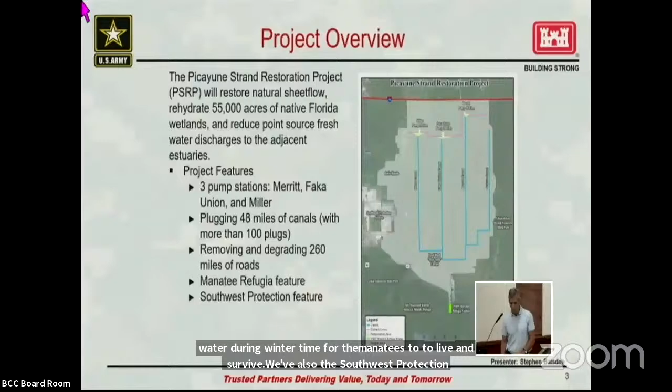The overall project benefits: again, we're going to reduce that point source discharge. We'll restore some of the water supply by recharging the aquifers, and by recharging the groundwater, we'll reduce some of the severity and frequency of the wildfires that occur out there. It'll help manage the invasive species. Also, by plugging those canals, we've had an influence of up to 2 to 3 miles away, which was impacting the Fakahatchee Preserve, right next door to the east of Picayune Strand. Since we've plugged the Merritt and Prairie Canals, we have noticed an improvement in the Fakahatchee Preserve already.

So CERP, the Comprehensive Everglades Restoration Plan, was authorized in 2000. Picayune Strand is a part of that Comprehensive Everglades Restoration Plan, and construction for Picayune was authorized in 2007. We have completed construction of the 3 pump stations — the Merritt, Faka Union, and Miller.

We've also plugged the Merritt Canal and the Prairie Canal. And we've also completed what were termed as the stair steps, on the eastern portion of the site, and the upper 3 miles of the Faka Union Canal. So we've come quite a long ways.

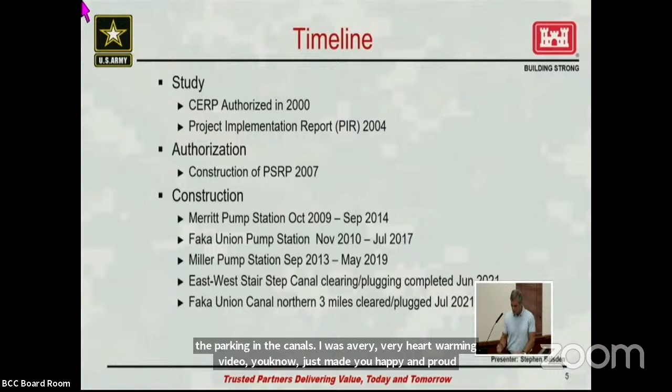So what's left? We have 3 construction projects currently underway. We have the Miller Tram and Road removal, which is removing all of the roads that are west of Miller Canal.

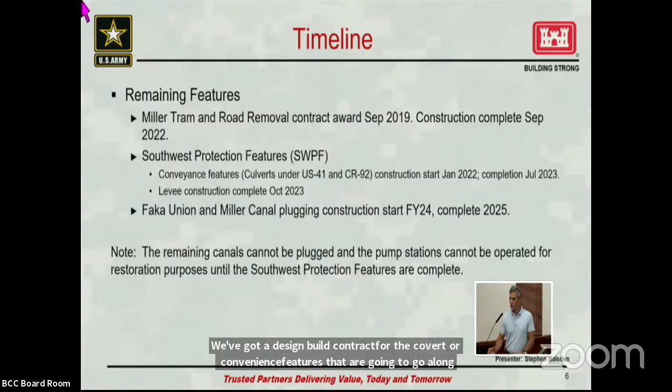We've got a design build contract for the culverts or conveyance features that are going to go along US 41 and County Road 92. Those are needed to convey that additional water south of those roads so that we don't impact them. And then the levee construction, the Southwest Protection Feature levee, which will be constructed to protect the agricultural area that's just west of Picayune Strand.

So all of those are underway. We anticipate the culverts being completed in July of 23, the levee being completed in October of 23. That would leave the remaining portion of the Faka Union Canal, approximately 5 to 6 miles, and all of Miller Canal.

So some of the things we are doing are looking at the timing and sequencing of the completion of those canals. Originally, it was thought that we needed to have the levee completely constructed before we could begin plugging Faka Union Canal. Thanks to some of your support and your questions, we were able to plug the upper third of it, completed earlier this month.

And we've conducted an analysis. It looks like now, as Colonel Polk alluded to, if we construct approximately 2/3 of the levee from south to north, we could start plugging the remaining of the Faka Union Canal.

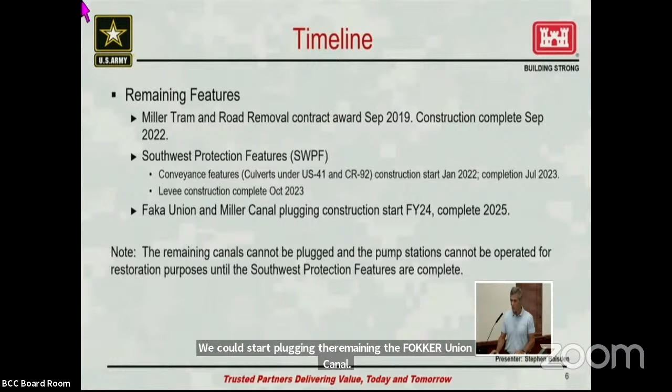The other things we're doing in order to be ready to begin that plugging is to clear the spoils that are adjacent to the canal. When they excavated the canal, they took that material and placed it on the side, and that's what we refer to as spoils. Over time, lots of trees and vegetation have grown through those spoils, so we need to clear that off so we can use that spoil to plug the canal.

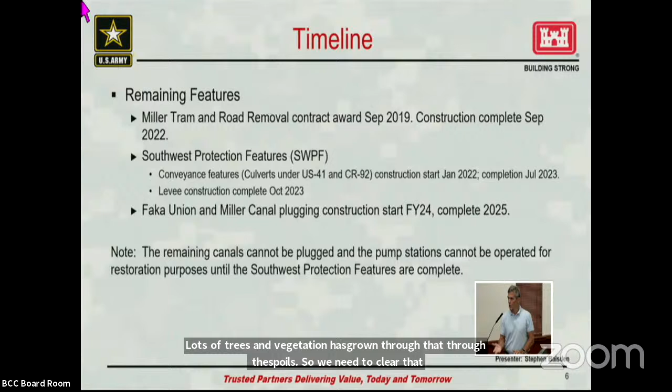So we're going to be doing that starting in January, beginning with clearing the southern portion of the Faka Union Canal, and then moving on to Miller, probably not next year but the following year. Again, the idea will be to have it all cleared so that once we have the appropriate amount of levee constructed, we can move forward and begin plugging the canal.

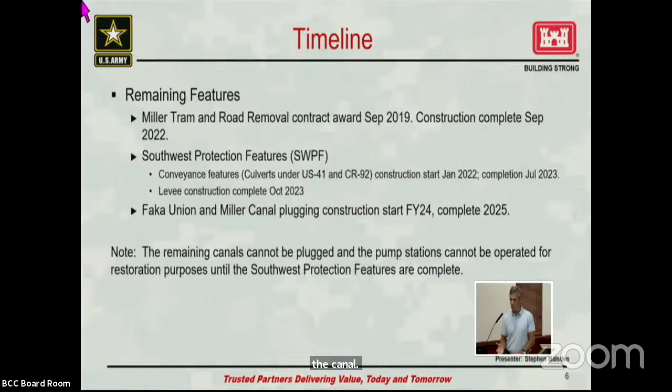And that's the Faka Union Canal. We're still doing some modeling to try to assess the timing of the Miller Canal. At worst, if we have to wait until the levee is completed, that would be late 23, early 24, before we can begin plugging the Miller Canal.

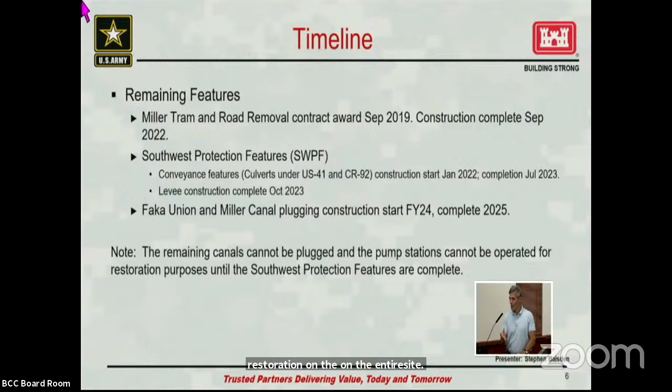And then once we've got the Miller Canal plugged, that will allow us to operate the Miller pump station, and then all 3 pump stations, and we will see restoration on the entire site. So as Colonel Polk said, we're kind of looking at 2025 right now. However, we do have some analyses running through that may move it up to sooner than 25.

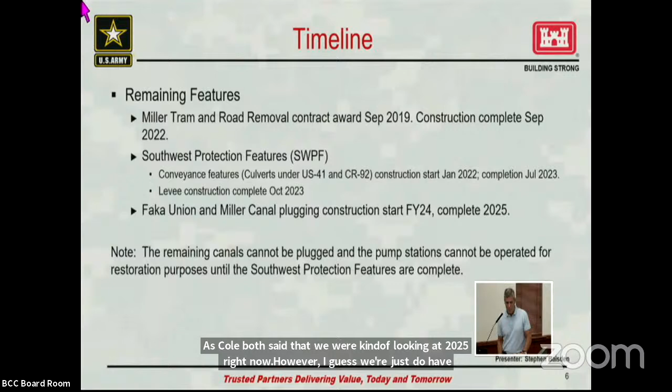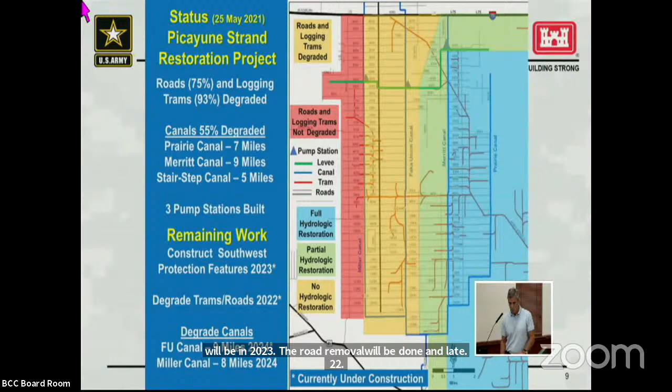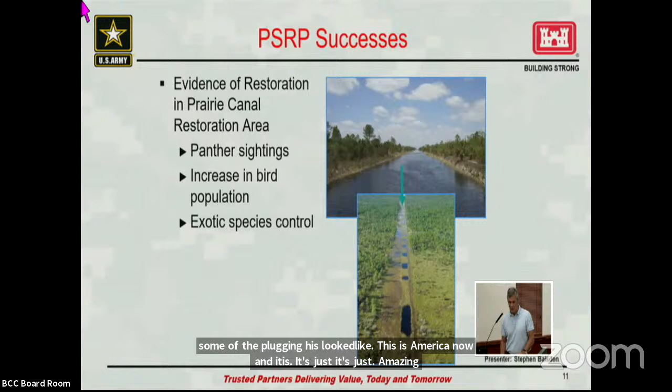So that's my brief, pending any questions. Board members, questions for Steve?

Andy, go ahead, just press your button. That should come up on my screen.

Thank you, Steve. I'll start out with a basic question. It's 2026 — how are you going to come back and measure the results of the project?

We do have a monitoring plan that we will be implementing, or actually will be implementing now, and it will continue on after the construction is completed to monitor the benefits and make sure that we're realizing them. We have a process called adaptive management, so that if we realize we're not receiving those benefits like we thought, we have a means to adjust some of the features if necessary to try to realize those benefits.

Is there any example you could give of the scientific way you'll be measuring it, be it aquatic populations of certain species or something else? They will be looking for — well, I wish I could remember some of those certain species, but I know they do look for indicator species, I guess, of some sort. Exactly. Not only in the Strand, but downstream as well within the estuaries.

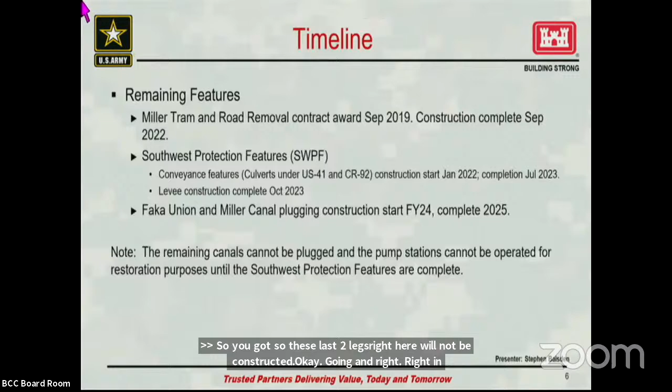Do you know how long that segment is? Just that one segment, meaning to get a feel for where it ends. No, ma'am, I do not. But I know the total length.

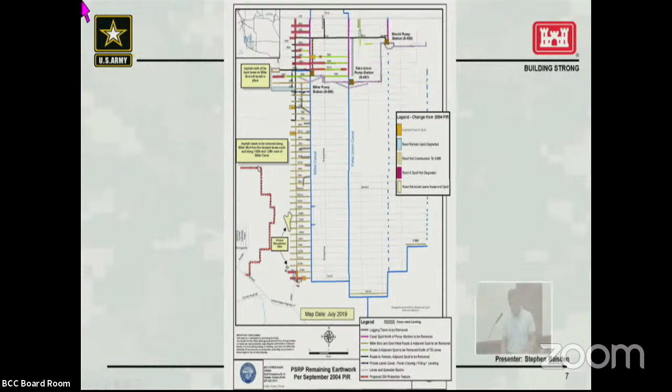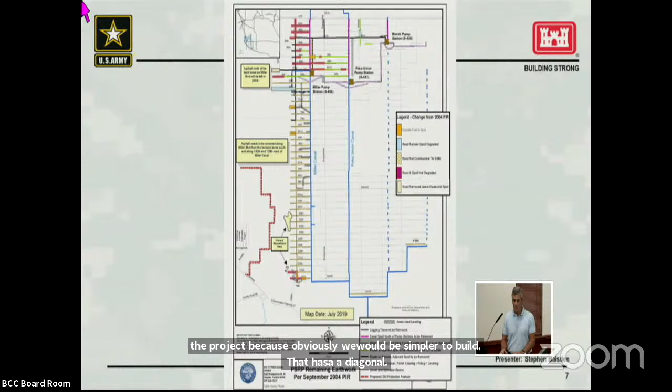So let's say from here to here is 7 miles. That's the length of the construction, and it's built in kind of at a 90-degree angle to limit the amount of land we're taking to construct the project. Because obviously it would be simpler to build it as a diagonal, or straight - I asked why wasn't it straight. Right, it would be a lot simpler to construct that way. But then you have these pockets that are just kind of in limbo and wouldn't be restored, and it would just require us to take more land.

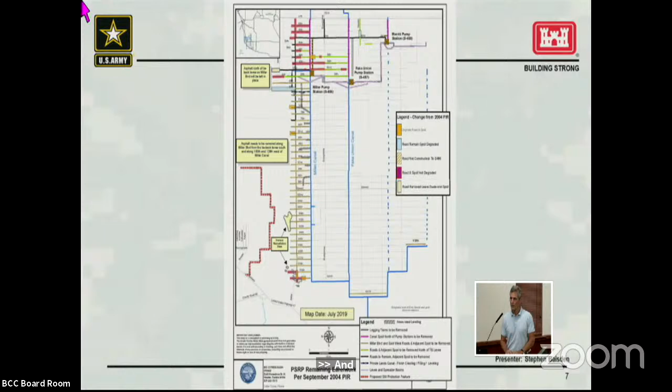Yeah, and I understand that. So how long is the Miller Canal that needs to be plugged? How many miles is the Miller Canal? That's 8 miles around. So that's 8 miles. Yes, ma'am. All right.

And on slide number 9. Okay, and this was the one that we talked about before the meeting a little bit.

Roughly in the scale of this slide, how far from the Picayune pump station does 3 miles go on this slide? Let's see, that would be 92nd. Can you point to that? Small - here it is right here. Okay, and then come over to the Picayune Canal.

I'm wondering why we're still showing it above Stewart. Stewart's one - right, we saw Stewart. Yeah, that's a great landmark there to look for it.

So when I look at your slide and you're talking about no hydrologic restoration, even though it's been a short period of time since we turned the pump on, when will you recognize that there's been hydrologic restoration since the area is inundated with water that is sheet flowing now through that first 3 to 3.3 miles? That's a good question.

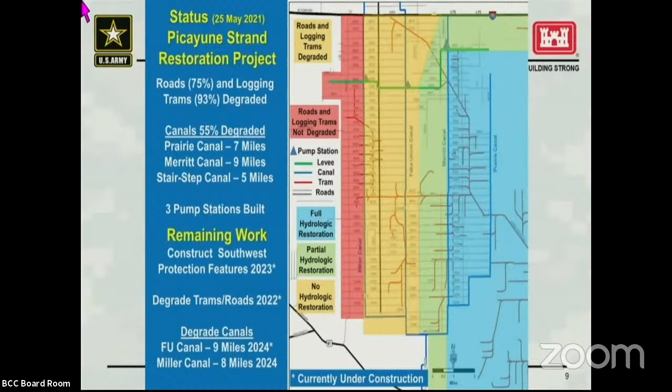Sure, but you're right - should there be some sort of restoration there? It does seem that there should be some sort of restoration right there along the canal, to the east, yes, and to the north of Stewart, exactly. But I'm not a scientist, and I can only use my eyes to see what the water was doing. And the water was doing just like you and the other smart guys and gals modeled - it's flooding out there, and there's a lot of water, and it's actually moving. So that's why I question the fact that, even though it's been a short period of time, you still have it yellow. That's why I mentioned it to you. Right, okay.

All right, just take a look at that. Absolutely, yes ma'am. And I really appreciate everything that you're doing out there to make this move forward.

I noticed that in the area of the Southwest Protection Feature, there's a lot of water, so that may be causing you to have to slow down a bit. I don't know what impact that has. Yeah, as I mentioned, it did slow them down, but now we've got the ability to come in from the north, so that should help them somewhat catch up on lost time due to the rain. Just the localized rain right there is quite interesting.

In fact, I was driving over yesterday, I could hear the thunder and it was sprinkling. I was in Big Cypress, and it didn't rain over there. But I went out to the levee yesterday afternoon. They said it was a bad storm, but only briefly, only 30 minutes, but nevertheless it came down. There were high winds, but it just seems like right there in that area, we've had a lot of rain.

So again, they're looking at ways to make up the time to continue to be productive by coming in from the north and working south. That will certainly help during the wet season. And then once the dry season comes back, they can resume the work from down there and move to the north.

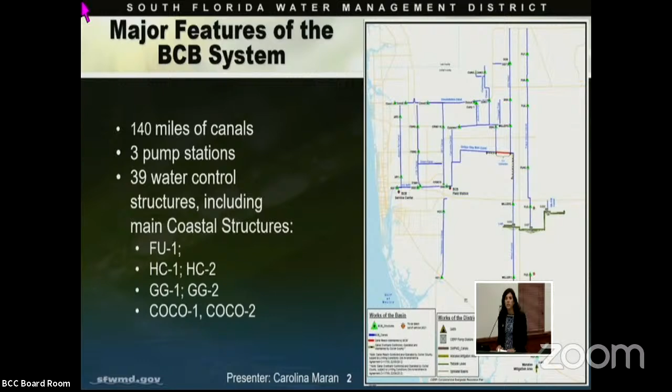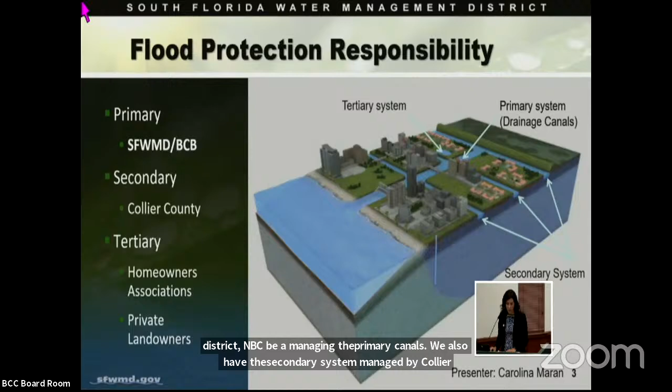One thing that is important to recognize is that flood protection is the responsibility of not only one agency, it's actually a coordinated effort among different agencies. We have the district and BCB managing the primary canals, the secondary system managed by Collier County, and the tertiary system by homeowners and private landowners. In this specific basin, Collier County also has a role in some of the tertiary system maintenance and operation.

These next two slides come together, and I'll start with observation. This is data that we monitor as an agency. We have a very robust monitoring program at the district, and what we want to focus on here are some of the trends we can observe.

Along with sea level rise, our shallow aquifers represent the integration between surface and groundwater across South Florida, and we see increasing water tables. We talked previously about the importance of recharging aquifers and increasing water tables, but during the wet season this results in loss of soil storage. In some locations, increasing water tables during the wet season reduce our capacity to store flood water in the basin.

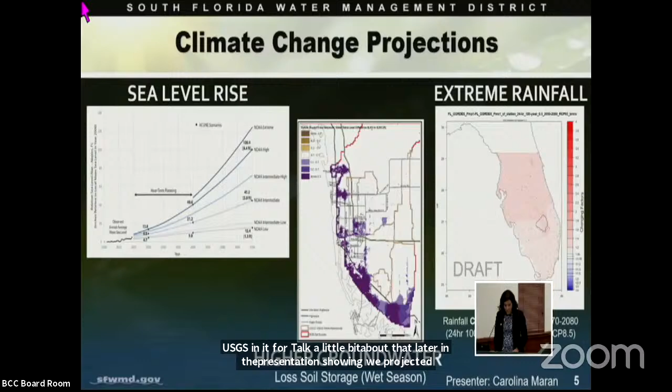We've talked a little about how critical we are in the system and some of the conditions we're observing, but it's important to also focus on what we are doing, starting with assessments and modeling. You probably heard Akin and his team talk about a flood protection level of service program. That's a robust program we have in place at the agency, part of our resiliency strategies, to really assess the performance of flood control infrastructure and ensure our system can provide the desired level of protection now and into the future, considering those changing conditions.

So this is a basin by basin assessment that we do, where we represent the drainage features in each location through really robust hydrologic and hydraulic models that we have in the agency to understand the vulnerabilities now and also into the future.

The program results are really helping us understand decision-making on how we can prioritize investments and adaptation strategies in the region. The program is structured in 3 parts.

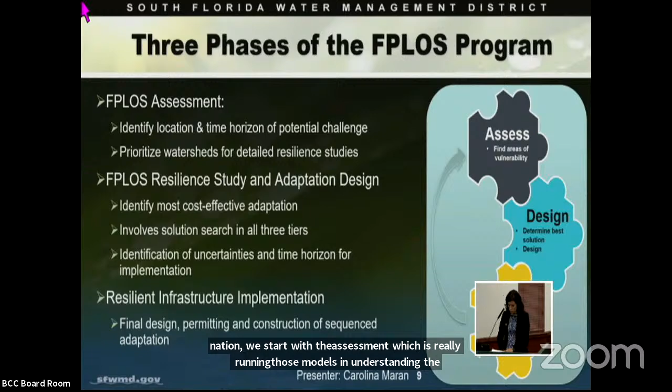We start with the assessment, which is running those models and understanding the conditions in the basin. Phase 2 is when we move to adaptation planning, thinking about projects and solutions we need to implement in those basins. Phase 3 is construction, when we move towards design and construction of the proposed adaptation solutions.

What we need to mention too is how we measure this, a piece of the assessment that's important to understand. So we have really robust metrics for the canals, like what's the maximum stage that we have in those canals?

When does it exceed the banks? Also, what's the discharge capacity in this basin? What is the maximum flood depth that we see on the land, so overland inundation, and also how long, what's the duration that we see for the flooding there?

And focusing on the tidal structure, the end of the system, what's the capacity during the storm surge, and what's the peak stage also caused by the surge and sea level rise conditions.

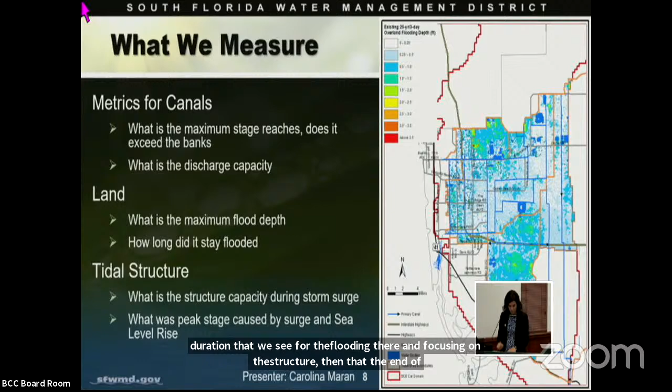I mentioned the flood protection level of service program. It was advanced here for the BCB Basin back in 2018. Here is a brief summary of the results that we have so far.

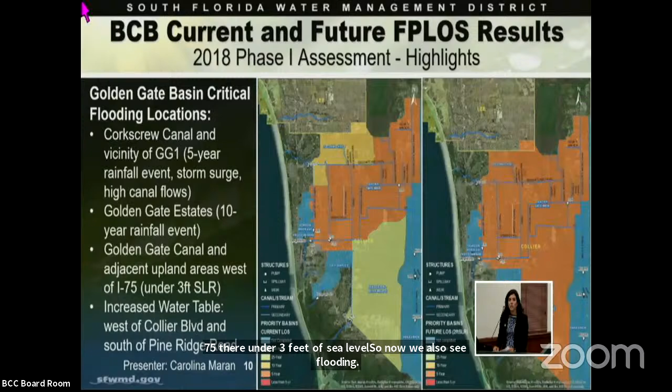And then Golden Gate Canal and all the adjacent upland areas west of I-75, under a 3 feet of sea level rise scenario, we also see flooding. Important to note in this basin too is increased water table conditions in the wet season, west of Collier Boulevard and also south of Pine Ridge Road. Those are the main findings for this basin of the assessment.

For the Cocohatchee Basin, we have COCO3 canal out of bank exceedances that occur with a 10-year rainfall event. We also have the downstream end of Cocohatchee Canal under a 3 feet sea level rise scenario showing critical flooding conditions. Finally, at the Henderson / Belle Meade Basin, we have significant stage and overland inundation increase all along the canal in all 3 sea level rise scenarios.

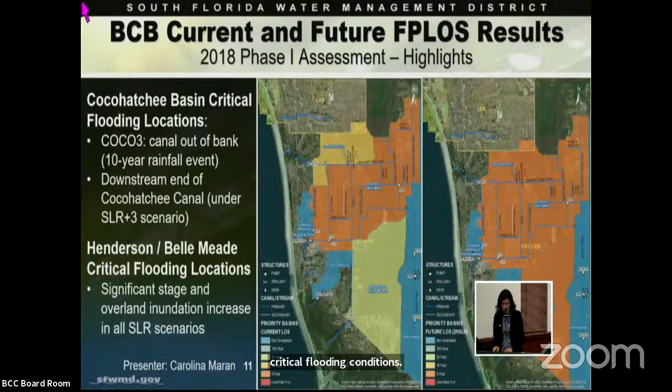Finally, I'm going to start closing this presentation with the recognition of this historic and largest investment so far in our state of Florida to address flooding and sea level rise resiliency issues. On May 12 this year, Governor DeSantis signed into law Senate Bill 1954, making over $600 million available to support efforts to ensure our state and local communities are prepared to deal with the impacts of sea level rise, intense rainfall, and flooding.

We recently established a working group to identify and describe our most attractive projects that might be eligible under this opportunity.

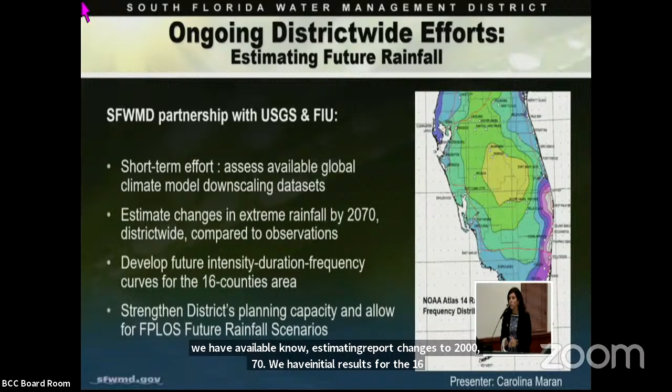We're also going to be proposing intensity duration frequency curves extracted from those models, hoping this will strengthen our planning capacity to allow more robust future rainfall scenarios in our modeling efforts. A final effort is our flood damage cost estimate tool as part of phase 2 of the FPLOS. When we start evaluating project alternatives, we need to understand the cost benefit of those alternatives. We're building a tool that we can run with our basin data, looking at FEMA, HAZUS, and other information important for us - the traditional methods used to evaluate those cost benefits and allow us to make comparisons among project alternatives.

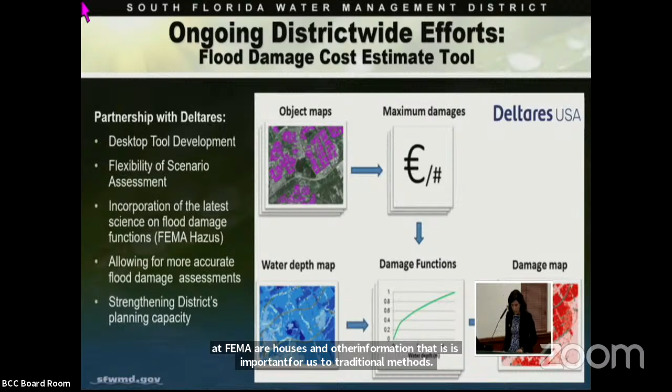Final message here is we need to recognize that we have significant progress in the region's efforts looking at resiliency. We're closely coordinating with all those other projects and agencies also working on resiliency initiatives. They vary - the focus of those efforts vary from coastal, storm surge driven, to rainfall, drainage driven, other protections - and the importance of also bringing natural-based solutions as part of this.

Collier County is working on a few of those projects, along with the University of Florida and Florida Gulf Coast University Picayune project looking at nature-based solutions and storm surge protection, also combining with drainage and flood protection inland system through a partnership with us at the district. We have the Army Corps Back Bay study in the region also proposing alternatives there. We have the newest Southwest Florida Regional Resiliency Compact beginning to also prioritize projects and investments in the region, and of course a series of other coordinated efforts. We need to work in partnership and collaboration with these other initiatives.

So thank you. Happy to answer any questions.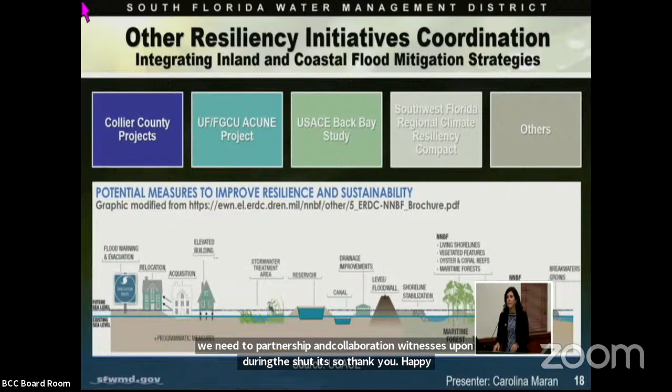Mr. Hill: I guess you're inferring we should invest in a lot of boots? Seems like, if I could surmise somewhat sarcastically, we should expect heavier rains and more rain events, like tropical depressions or hurricanes. Would that be what you're suggesting? And therefore we've got to deal with a huge amount of water in a short period of time, and drainage is a challenge, and this board will have to deal with that issue.

That seemed like the direction you were going with your presentation. Yeah, we're trying to really understand, with some science advancements, how far we want to invest in those hardening strategies. We don't want to use more money than is needed, and we want to understand what the critical conditions will be in the future. So understanding how those extreme rainfall events occur is important to assess and measure the significance and impact on our needs and infrastructure investments.

Okay, just as a follow-up, looking at the charts of the change in sea level, it appeared to me visually that there's been a significant increase more recently. Yes. So we're increasing at an accelerating rate then? Yeah, we see an acceleration over the past five years. Okay, there are some studies coming to try to understand where that comes from.

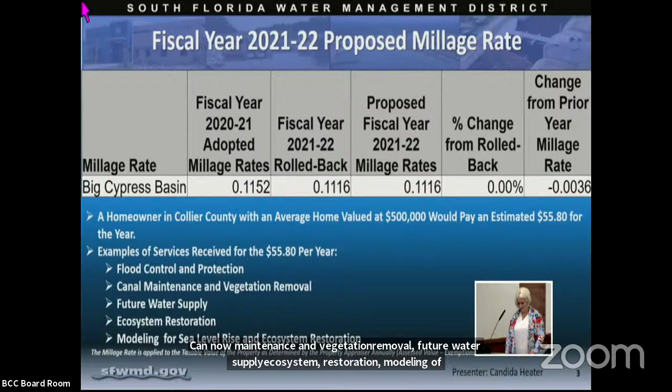And I want to thank, I think it was you, Mr. Hill, that made that suggestion at our last meeting, that would be good information to know. So I think that really resonates, to see how much you get for your money. Thank you.

So moving on to the budget, there's no change in the budget, either in the revenue categories or the expenditure categories from the July presentation. So the budget is $17,442,227. Revenue and expenditure is balanced. That is a requirement - you have to have a balanced budget.

Ad valorem taxes being the largest of the revenue sources, using some of your fund balance due to what we had discussed at July, because of some increases due to the capital program, which Lucine will be discussing after myself. And then the larger portion of the expenditures is the capital program, flood control operations under Rich Virgil and Jesus and Juan, and then obviously some of the funding for the regional partnership projects.

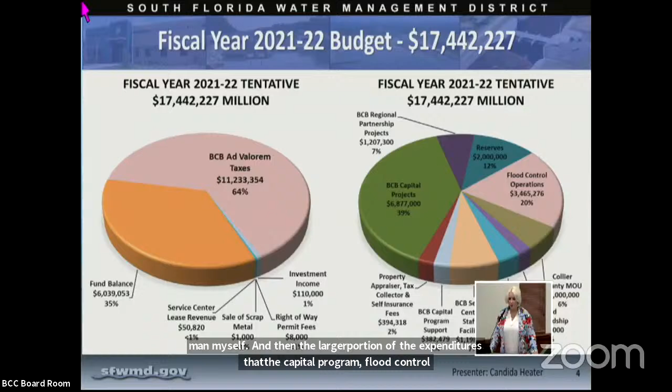So something a little different in the presentation that we like to do is highlight who's going to be responsible for performing and getting the work done for the Big Cypress Basin and for you. So the administrative services and executive offices will be responsible for the general services and facilities work, as well as the control room. The Big Cypress Basin, which is Lisa and her staff.

Some of the highlights are the Collier County Settlement Agreement, the Picayune Water Quality Treatment Site Analysis, and the Regional Partnership Projects Program.

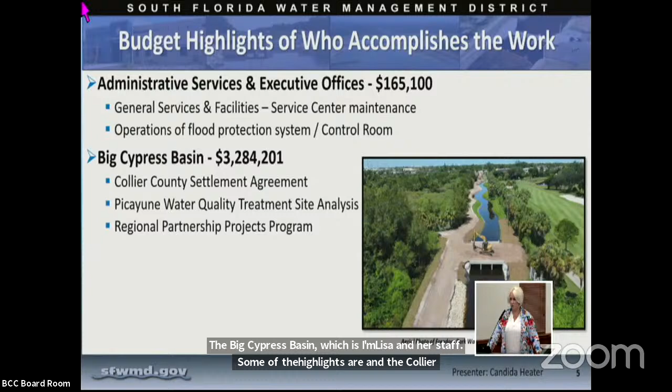Ecosystem Restoration and Capital Projects Division under Miss Jennifer Reynolds - that is a little over $8 million, and that is the area responsible for your capital projects, Lucine, as well as some of the modeling efforts. Field Operations Division under Rich Virgil, Jesus, and Juan - that is the field station operations.

Information Technology Division is under Dwayne Piper. He has the SCADA group reporting to him, responsible for the SCADA system here for the Basin. Real estate and land management is Stephen Collins.

He is over the land management and vegetation group, responsible for land management activities for the Collier County portion of CREW lands. Then the debt service fees and charges, which is your hurricane emergency reserves, property appraiser, tax collector fees, and self-insurance program, falls under administrative services but is labeled separately here because it has separate controls on it to where you can't touch it in the financial system.

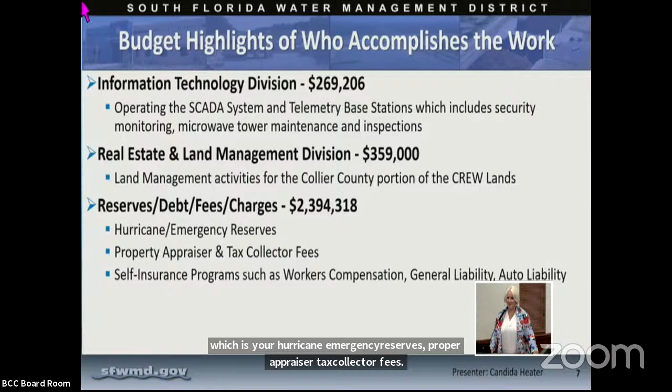Unless needed. So moving on to next steps, we do have two public hearings after this meeting at the district headquarters, September 9th and September 21st. The 9th is the tentative hearing and the 21st is the final hearing at 5:15.

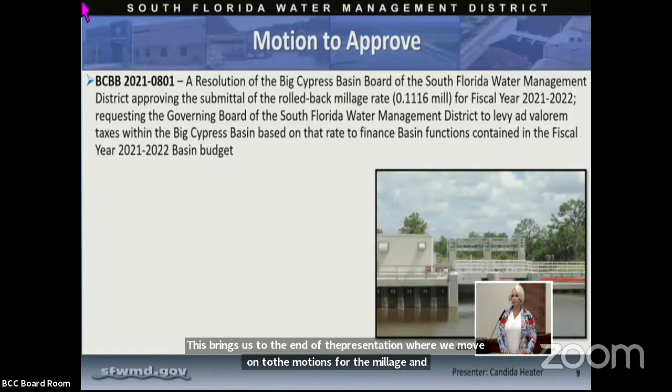This brings us to the end of the presentation where we move on to the motions for the millage and for the budget. Is there any board comment before we move on to the motions? No. Okay, Erin, is there any public comment at this point? I have no public comment, Madam Chair.

With no public comment and no further board comment, I'll ask for a motion on the very first motion to approve, and I would ask that the motion maker please read the motion. Do I have the motion, please? I'll go ahead and read the motion.

Motion to approve a resolution of the Big Cypress Basin Board of the South Florida Water Management District approving the submittal of the rolled back millage rate of 0.1116 mils for fiscal year 2021 to 2022, requesting that the governing board of the South Florida Water Management District levy ad valorem taxes within the Big Cypress Basin based on that rate to finance basin functions contained in the fiscal year 2021 to 2022 basin budget.

Thank you very much. Is there a second? I second. Ms. Rivera seconds. Then we'll go ahead and vote. Vice Chair Waters, Yes. Ms. Rivera, Yes. Mr. Hill, Yes. And I vote yes. So that motion passes 4-0.

The next motion, I will entertain a motion from a motion maker on this one as well. I would ask that you please read the motion. Do I have a motion, please? I'll go ahead and make the motion to approve a resolution of the Big Cypress Basin Board of the South Florida Water Management District submitting the fiscal year 2021 to 2022 basin budget in the amount of $17,442,227 to the governing board of the South Florida Water Management District for inclusion in the district budget.

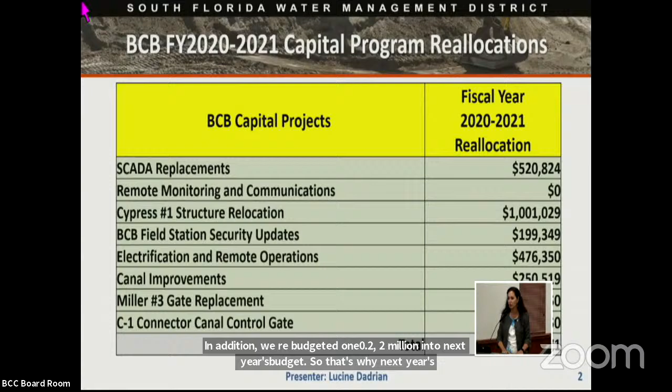So we have kicked off a lot of construction this year. The first project we call SCADA replacements, but this is really either replacing a site, or a new site, or a stage recorder. It's just a bucket of different types of telemetry and water readings. So Cork 1 and GG 67 are both downstream structures of those two structures, so we're getting that reading downstream. We have the upstream already, and we need the downstream.

The DeSoto 10 is a stage recorder, so it just stands out there on its own. It helps us with determining how to move water within the system. This was kicked off a while ago, and we had some issues with constructability on a couple of sites.

The contractor proposed a different method. We have two standards: one is concrete piles, and one is stainless steel and aluminum. So we switched two of the sites from concrete to the metal application. The contractor recently mobilized to the site, and even though we had a few delays deciding how to move this forward, the contractor is still on schedule to complete it within the contract time, which is great.

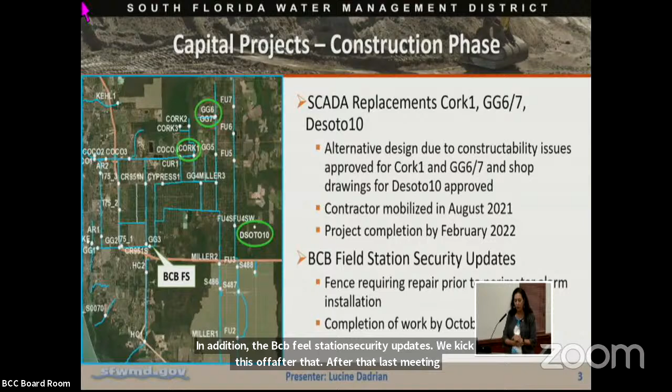In addition, the BCB field station security updates kicked off after the last meeting approval. There were some fence repairs required prior to the perimeter alarm installation, and from what I understand, the work is ongoing and hopefully will be complete in October.

So the Cypress 1 structure relocation came up for two reasons. One, we were looking at the end of its service life, and the fact that Collier County wanted to expand the Vanderbilt Beach Road extension. So we got together and determined that if we need to move everything south, we would replace the structure. Collier County is doing the canal work as well as demolition of the old structure once the new canal and structure are in service.

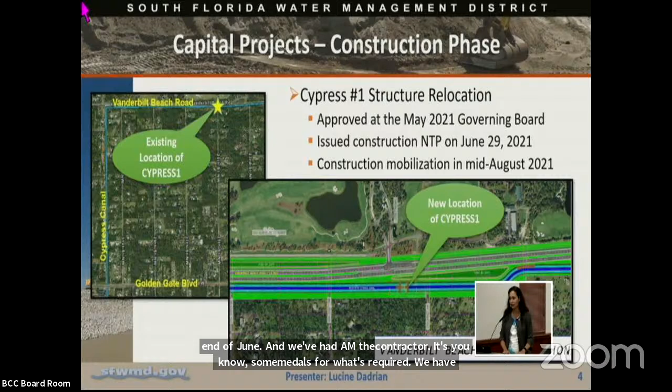This was approved at the district's May governing board, and we issued notice to proceed end of June. The contractor is submitting submittals for what's required. We have to review all the submittals, but we're in progress, and we look to have construction mobilization by the end of the month. I know it says mid-August, but it'll be by end of month.

The next project currently being executed for construction is the remote operations of Cork 2, and the generator building and site improvements at Faka Union 5. Cork 2 is really a manual structure. It's the furthest structure we need to get to, opening and closing the gates almost on a daily basis. This takes a lot of time for the field station staff and takes them away from doing other great work that they do. So this was one of those sites we decided to add remote operations.

The generator building at Faka Union 5 is one of our critical flood control structures for the basin, and if it's a critical control structure, it requires a generator backup. It required a new building and a new generator to be replaced. This project was awarded in July at July's governing board, and we have a construction notice to proceed in September.

So those three or four projects were newer construction projects that only recently got kicked off in the last quarter. Here are two projects that are coming to completion. Miller Weir number 3, all gates are replaced. This structure was built back in 2014 with two gates that could open up and down from both sides. What happened, and how that was designed, ended up being a problem - it would bind, and we would have issues fully opening to the required gate elevations.

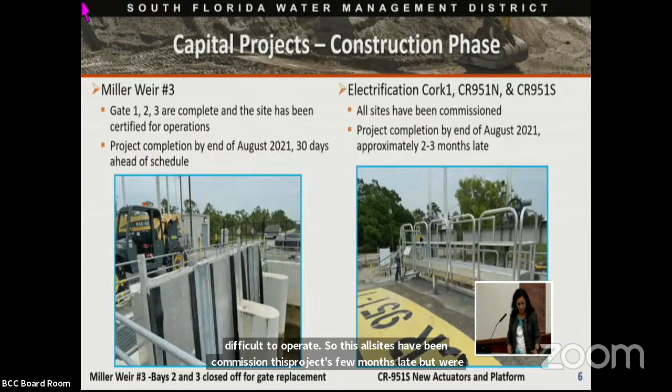Moving into projects and design, canal improvements. I've spoken about these before, but we've broken them out into Miller and C1 Connector Canal, the I-75 and Green, and the Cypress Canal. We did modeling and assessments on all three systems. The work for Cypress was completed in-house back in January. The other two will be complete by September and November. From that, we'll decide how we want to move forward and what's affordable to fix the system. We'll know which projects we can feed to the capital program from there.

The Faka Union bank stabilization has been a discussion in the past. What do we do with the receding right-of-way and canal banks? We completed a preliminary design with the consultant, and we're evaluating it because it's very expensive to do the work, and it may actually take away some conveyance from the canals to do a proper fix with bank stabilization and riprap. So we need to evaluate further - do we want to look at right-of-way acquisition, or other alternative erosion protection measures? This is not going to be an inexpensive fix, so we need to do more homework on this.

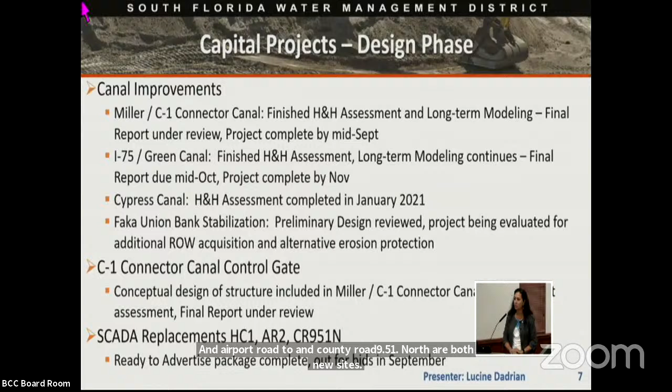And then the last project in design, again, SCADA replacements. We are adding HC1, Henderson Creek 1, as a replacement site. And then Airport Road 2 and County Road 951 North are both new sites. We should have that design complete and ready to advertise in September. Okay, and that's all I have.

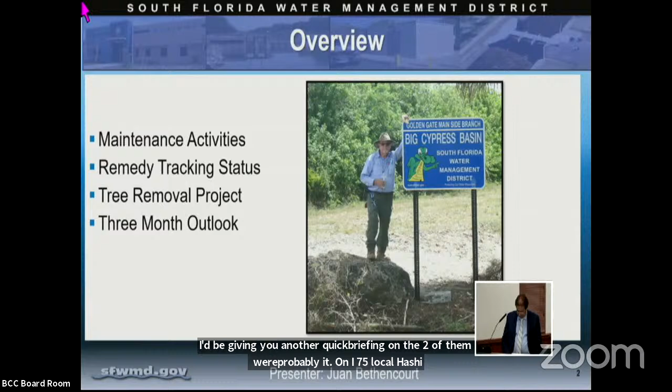As part of what we've been working on for maintenance activities, we've been replacing signs. It's been a big effort by the field station team. So far this year, we've replaced over 15 signs throughout the area. This is an example on the Cocohatchee Canal, where the sign was fading and leaning, and we replaced it. On this slide, you can see the before and after picture.

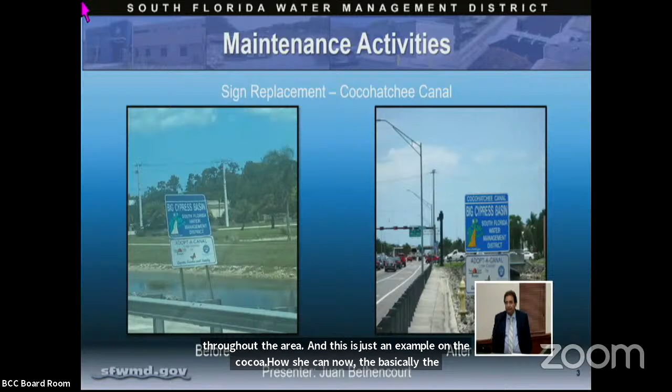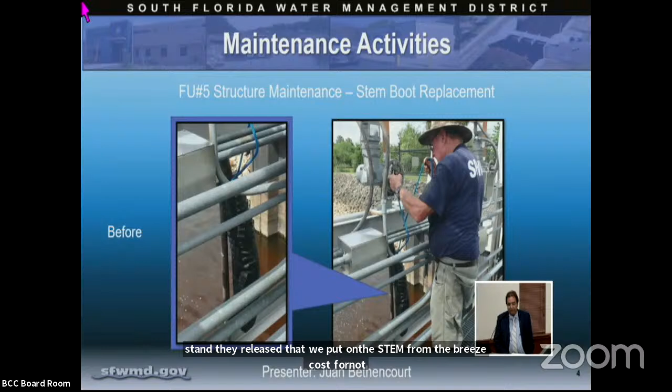Again, as part of the maintenance activities for FU5, we had to replace the stem boots throughout the structure. These are some pictures of the before. Just for general information, the stem boots are basically the covers for the valve stems, to protect the stems from the grease that we put on them, from debris, dust, and foreign objects that may impede the right operation of the valve gate. This slide shows the before, and this is a specific detail of one of the stem boots we replaced. On this slide you see the complete structure on FU5 with all the stems already replaced. It seems like a simple task, but the guys spend quite a bit of time out there because it takes time to replace them, and more than one person to do it.

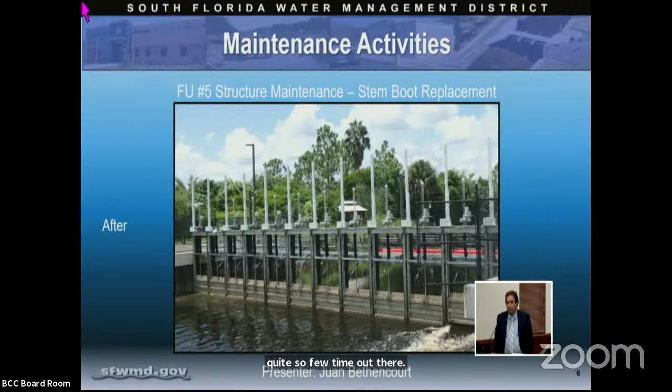Something that's an ongoing thing is debris removal. Here you see the before and after picture of some of the debris we had to pull from that culvert on the left in the before picture. All those branches, pieces of wood, whatever, were under that culvert and taken out by hand. Something you think is going to be simple took us the whole day to do. You have to keep doing it, because it restricts water flow in the canal and can do damage to structures, gates, and so on.

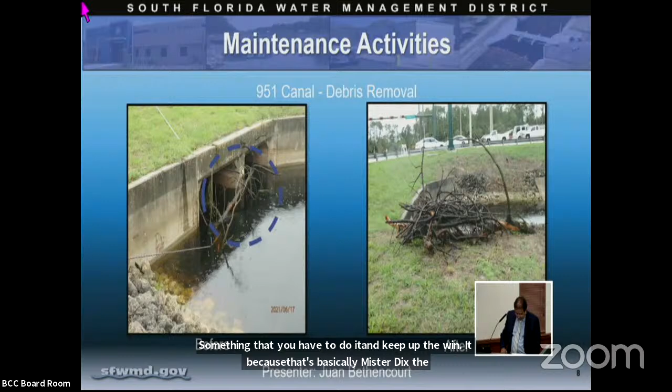Again, some debris removal, this is on the 951 canal. This is part of why we have to have Tuff Booms. You see all the accumulation of garbage, vegetation, debris being thrown into some of these canals, and how the team, with the help of the Long Reach, cleared it out - that's the before picture, and right after we finished, that's how it came out.

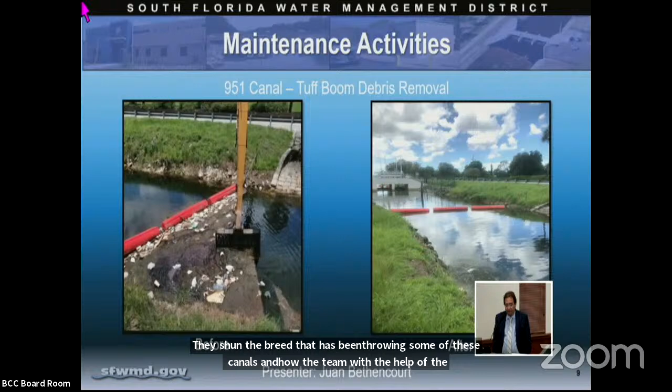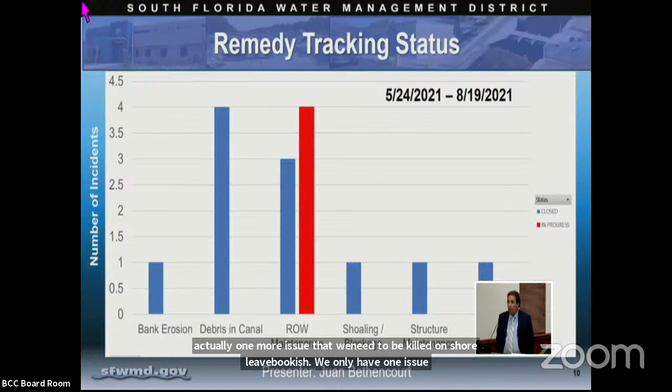Just to give you a quick status on our new remedy tracking tool - we've been tracking different complaints from the community, and now we can put it in a way that can be seen graphically, with statistics. For bank erosion, since 5/24th we've been dealing with just one issue. Debris in Canal has had around 4 issues. This is up to 8/19th, so we keep updating this report as we get more complaints and issues. For right-of-way maintenance, we resolved 3 issues, with one more we need to take care of. Shoaling / blockage, only 1 issue. Structure maintenance, 1 issue, and 1 issue on a vehicle in a canal that we took care of with help of the county and law enforcement.

Going back to the tree removal project - now that I see this slide it seems so long ago, because by now we're almost finished with the tree project. Let me go through this slide real quick. We got 3 quotes; Merico Inc was the lowest company that provided the best bid for the project. We did a wildlife survey back on August 3rd. The project started on August 9th. We keep updating the website so people can go see the status of the project.

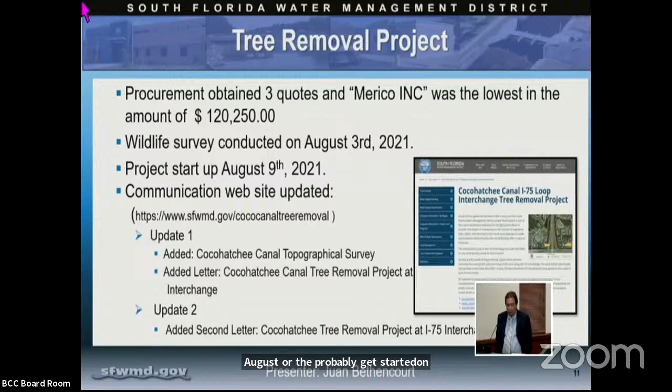This is just a quick sketch of the area we're talking about - the I-75 loop, Cocohatchee Canal. At this point all the trees have already been taken out. We're staging all the debris in just one section and moving it away from the site. It's been a slow process because of the storm last week and the rain - we don't want to damage the area, so it's been slow. But we're hoping to have everything done by the end of next week, weather permitting, if we can get people to move the debris out of there.

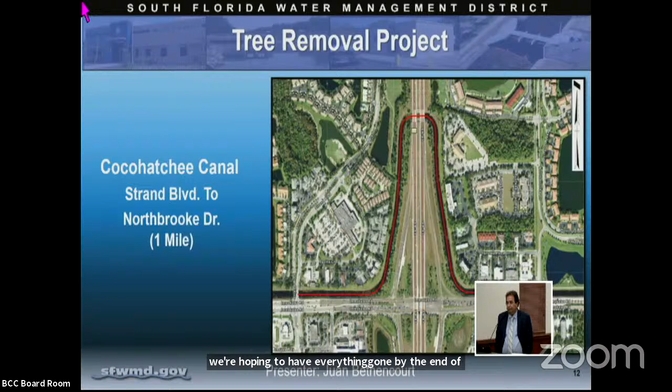As part of what we're looking at for the next 3 months, we will continue canal maintenance, mechanical harvesting, vegetation management, debris removal on the different canals, and Tuff Booms with barriers. For structure maintenance, we'll continue our yearly work plan performing preventative maintenance on the various structures we have. We're hoping to finish the tree removal project. For system operations, we'll continue supporting the operational orders given by water managers as the rainy season continues.

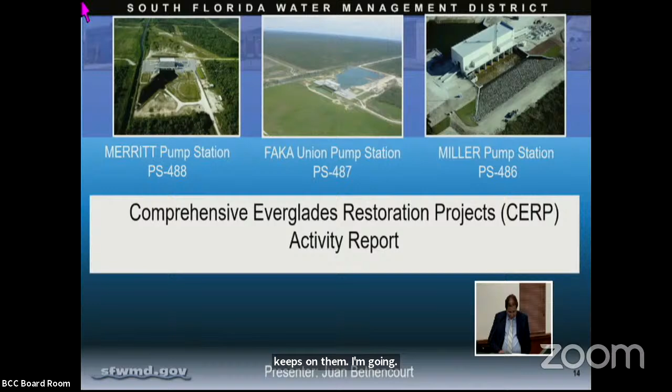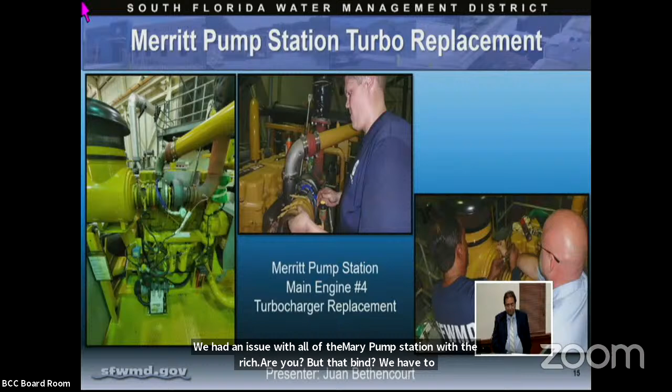For the 3-month outlook, we're ready to respond to wet season activities, orders, and issues. We'll continue monitoring, updating, and logging operational parameters - pressure, temperature, vibration, output volumes - of all the pump stations, the Merritt and Faka Union pump stations. We'll also be doing housekeeping and safety monitoring of all the pumps, motors, and accessories.

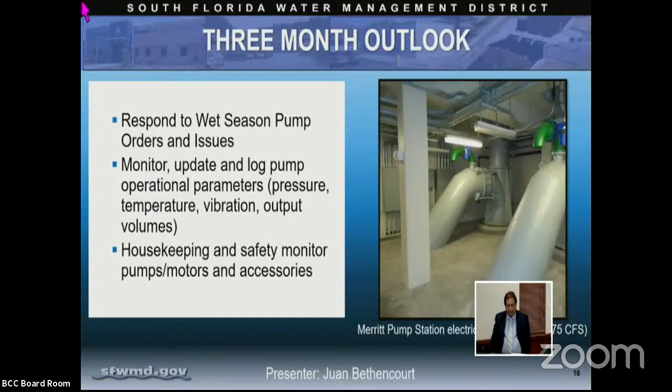And with that, I'll take any questions. Is there any board questions for Juan?

I have a question. On your remedy tracking status, slide 10 that you showed, you had one incident of bank erosion. What is that exactly?

Along the canal bank, there's an area that has been eroded. We get a call from one of the neighbors asking if there's anything we could do. This particular one was at the airport canal along the boardwalk. There were some erosion issues that people would see as they went by, and they called the field stations. We went out there, evaluated the area, filled the spots with material, compacted it, and put it back to standard. That's basically what we did.

So from your professional opinion, to help me understand, Lucene had brought this up, and I had talked with Alan Shirkey too about the cost of bank stabilization. What's the fine line between bank erosion and bank stabilization? At what point does it need to be stabilized versus just fix the erosion? Can you help me understand that, and help the board understand that?

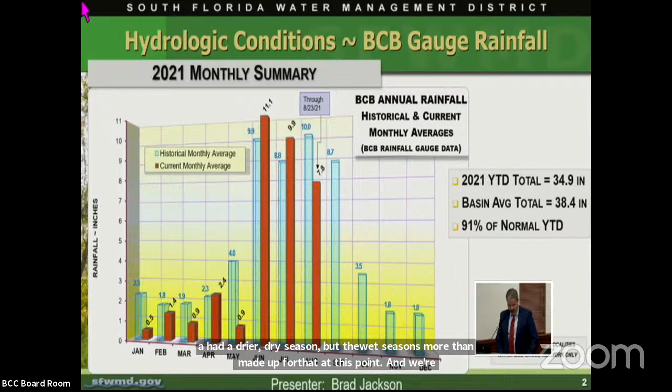As I usually do, starting with our monthly summary for the year so far. Looking at 2021, it's only been a month since we met last, but we're pretty close to average. We had a dry season, but the wet season has more than made up for that. We're sitting at about 90% of average for the year to date, about a 4 inch deficit, but the wet season so far is pretty much on average.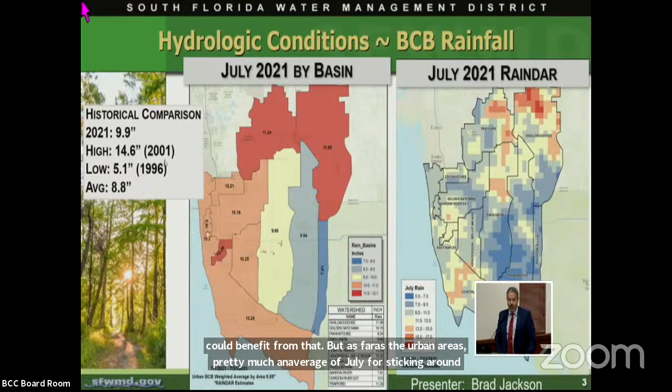Looking at our July rainfall, we've got a map on the left showing average rainfall by basin within the Big Cypress Basin. The two winners of the basin are the northern natural areas, Corkscrew Swamp, and those areas got 11.5 or so inches of rain. On the map to the right, the darker reds show 17 to 18 inches of rain in localized spots—definitely high totals in natural areas which could benefit from that. But as far as the urban areas, it was pretty much an average July, a little more than average at around 10 inches, but far from our high of 15 or 14.5 inches 20 years ago.

The highlight so far for August weather-wise was Tropical Storm Fred. Starting on the bottom left of the screen, this is when we were monitoring the storm as it approached Hispaniola, which acts as a blocker for us with all its mountains, helping it not intensify too much and keeping it as a low-grade tropical storm depression. At that point, Southwest Florida and Southern Florida in general were all in the cone of the storm, so we were watching that.

In the middle of the screen is our rainfall forecast, showing big swaths of yellow and orange—that's 4 to 6 inches of rain projected over the whole region, with some areas forecast at 6 to 10 inches. To relate that to design storm information, 6 inches in one day is about a 5-year storm, which gives some context. We didn't end up getting that much water, but we did need to prepare for it. We didn't do a full storm drawdown, but we did some lowerings to make sure we could handle the 4 to 6 inches coming, as the track wobbled around going over Cuba.

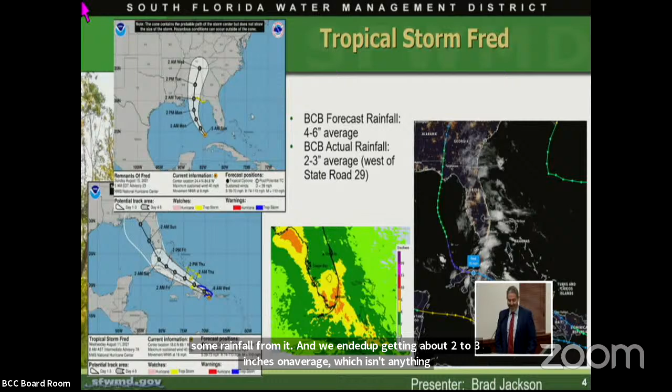So I wanted to show some examples. We talk about how much we lower things down, but I thought we'd grab some pictures this time around of what the lowerings really look like. This isn't pre-storm drawdown operations. There's still a lot of room left. We could have done more if the forecasts were higher.

Just to walk through this real quick, the top left here, this is our I-75 two-weir, near Pine Ridge and I-75 near the hospital. Normally this time of year, you'd see 6 to 8 inches flowing over this concrete wall, and that's the weir you would normally see. This area can be prone to some issues, so we wanted to lower those levels ahead of time to make some room for the rainfall. We just wanted to document and show what it looks like when we do a lowering, to give it some context to the board and to the public here.

And then on Henderson Creek 1, it's a similar type of structure to the I-75 two-weir, with a fixed crest weir, so you've got water flowing over that. But the takeaway there is we're releasing water through these much bigger gates, the underflow gates to the right here. We do have more tools in our toolbox. We can get these lower if we need to. I want to keep iterating that.

And then this is our new GG4 structure to the right here. This is about a mile north of Golden Gate Boulevard and 8th Street Northeast. You can see the gates are actually out of the water in this structure, so that doesn't happen too frequently. We were still controlling this with our downstream structures, but this area is a little bit slower to respond. So we wanted to get levels under control ahead of the storm, given how wet our July was with a little bit of above average rainfall.

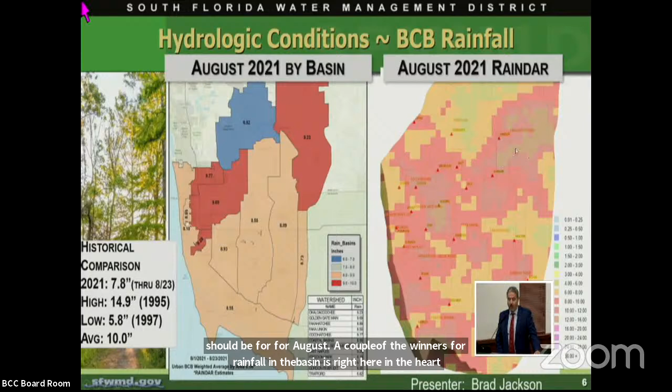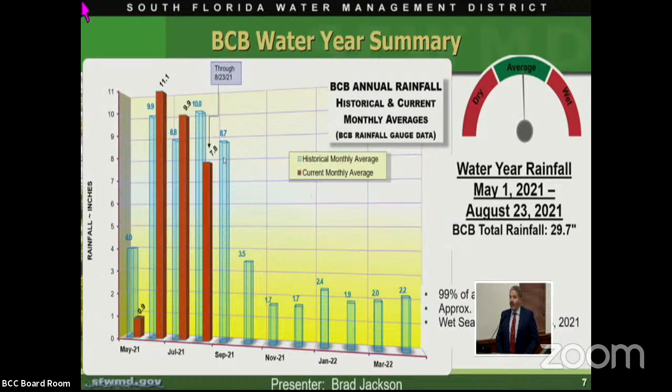So I talked a little bit about the whole calendar year, but really the water year, the impacts of last dry season have pretty much been erased. I wanted to show how much rain we've gotten since the rain season really started, and you can't get more average than what we have here. We've got 99% of average, only not even half an inch deficit from where we normally are for this time of year. So we're in good shape going into the peak of storm season. We don't have too much of a surplus and our system's not overly full anywhere, and we've got a lot of capacity left in the system for any storms that do come up.

So moving on from here, how much water has actually left the system? Compare this with the amount of rain we received. These numbers are small, but if you compare them to how much we've normally released for this time of year, we're below average. So we're actually able to hold on to more water, promote groundwater recharge, and not over drain the system, finding that balance. For example, GG1, we're at 60,000 acre feet released since May 1st. Normally this time of year it's around 65 or 68,000. So we're lower than normal, which helps show the operational flexibility that all the capital improvements have had. It lets us fine tune our system that much closer.

Also of note here, the Picayune Strand PSRP to the right, that's our second biggest one really as far as it's a managed system. There's been more water pumped through that system than through Henderson Creek 1 or COCO1 added together, so that's interesting to note. Obviously the watersheds are bigger, but it does show the restoration flows right there that you can see. To the right here, just an example of how much water you really can move through GG1. This isn't from this year, fortunately, but it is just a testament to how much water really can flow through that canal.

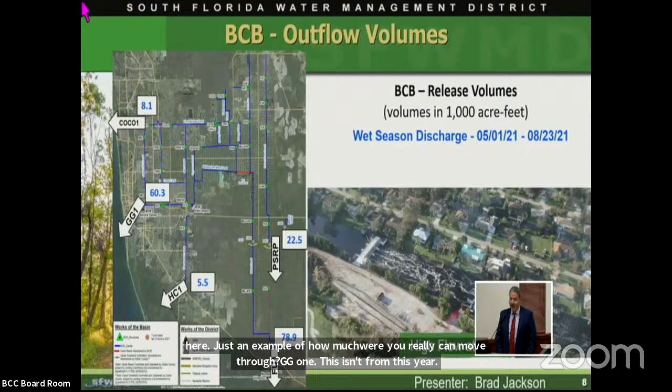I'll quickly walk through the canal system. These are just a couple of critical points in each watershed. The purple is GG1, the blue is GG4, and you've got the corresponding historical trends here on the right. Where you can see the dips, those are our pre-storm lowerings. If they were a pre-storm drawdown, they'd be lower than that for sure, but we lowered them to the bottom of our operational range, that blue band we stick in. You'll see an overarching trend where we're trying to run near the top of this blue line, where we have quick responsive structures and can respond quickly with automated controls.

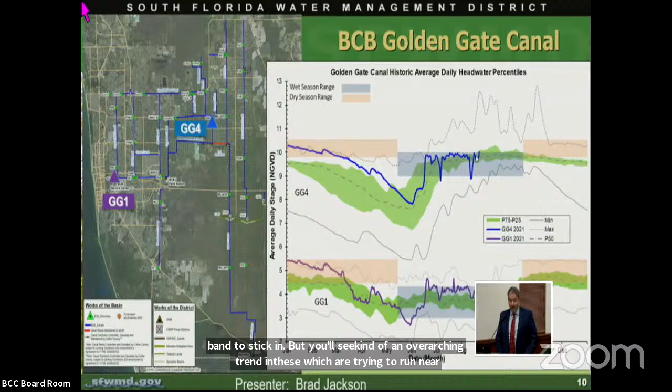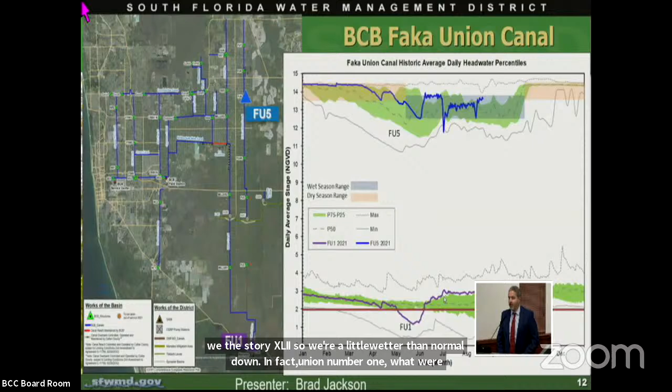So moving away from the basin operations a bit, over to the Picayune Strand operations - this is really the first time we've seen the Picayune pump station operating for more than a few days, which I was talking about in the last presentation. The overarching trend here, the purple and blue lines, we're trying to follow and mimic the 75th percentile, the top of the green band. If you remember the FU1, it was right at that 75th percentile, so I'm trying to mimic what's been going on historically with the pump station operations. That's been the target.

There are some ups and downs. It is a manned pump station. You can't do that perfectly, but that's the overarching trend.

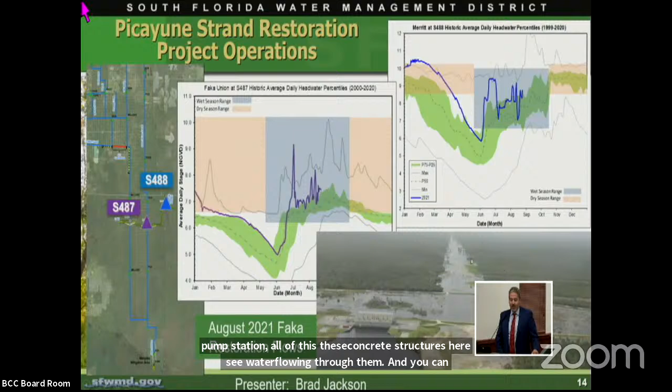At the bottom here, there was a flight not too long ago, this week I believe, that really shows the restoration in action. This is after about a month and a half of continuous pumping at Picayune Pump Station. All of these spreader, these concrete structures, see water flowing through them, and you can see the water sheet flowing all the way down to where the plug stops, and they'll continue that next year. It's really cool to see that, especially from the air and seeing it in motion. It's really nice to see.

So that's a picture of Picayune Strand. Here's kind of our interpolation using our topography and all of our well sets. I want to walk through this real quickly here. The highlight here, crew, this is Corkscrew area. You can see the greens and the blues are where the water is above ground, and if it's dark red, you're 2.5 feet or more below grade is where the water is.

So you want to see in August that you would be above grade in your natural areas and your wetland areas. What's interesting, last year, the one on the right, that was one year ago, we had lots of areas of dark red without water on it. We had similar rainfall patterns, so I don't necessarily have an explanation for that. That's just what the information is showing here. It could just be the exact location of where the rain sat, some canal operations, but for the most part, that's just a result of rainfall.

The thing I really want to highlight is Picayune Strand, the box here at the bottom. Last year, this time of year, you saw no greens or blues south of Picayune Pump Station, which is about where my cursor is, right under the S on the right. If you fast forward a year, then you've got this green blob here, and that represents that sheet flow that I showed on the last slide. It's really cool to see that - you can see it here, you can see it in the pictures and in the model. It's all running together, which is awesome to see.

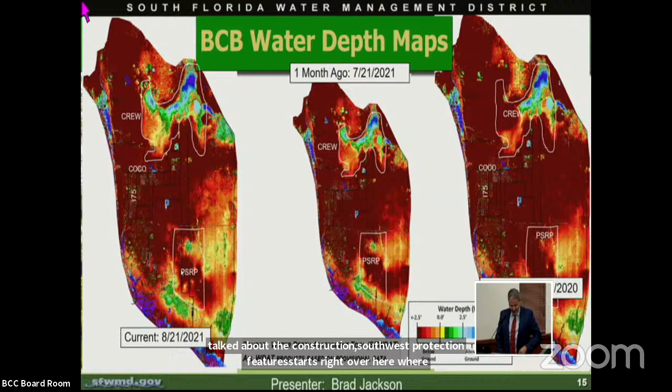Moving on to groundwater trends, as you would expect, groundwater trends are on the up this time of year. We're starting to reach our normal peak of those levels in late September, early October. But for the most part, everything's normal and in the median range for the period of record for all of these wells, so we're not seeing low groundwater levels anywhere in August, which is a good thing.

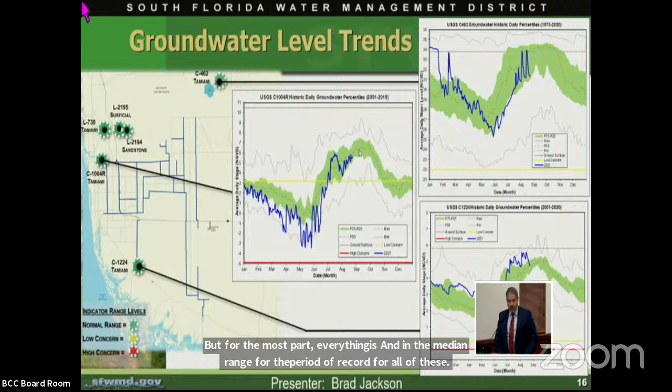Looking further out in the future for September and then the first part of the dry season, we're seeing equal chances - that's what's predicted. Again, these are just climate models, so they don't necessarily have fine resolution. We can't count on them, but it gives you an overall trend on what we might be able to expect. What I'd like to note here, on January through March next year, we do have this below average rainfall possibility again, which we had this year. So as we make a transition in dry season, this is kind of an indicator of when we might be able to make the switch into dry season so we can start to conserve more water in our system and prolong the amount of time that we have it instead of losing it to tide.

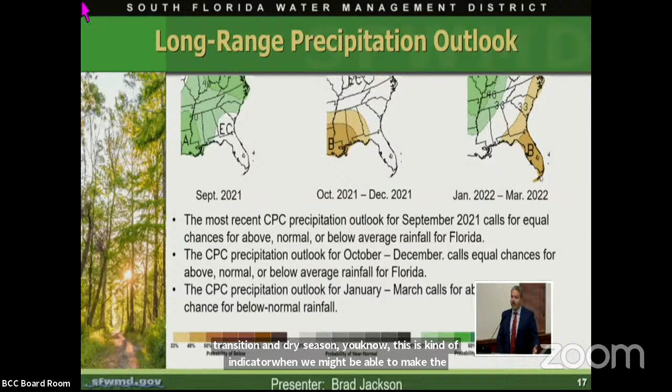In the short term, it's probably going to be a wetter weekend. We've got a tropical - I think it's a depression now - that came out this morning. It's no longer just an area of interest, but it's going to move northwest towards Louisiana. And then as it skirts by the peninsula of Florida, we might have some rainfall over the weekend, but nothing like Fred or anything like that that we need to worry about. So, but as always this time of year, we got our eyes on the tropics and are ready to make changes as need be, and off we go with hopefully no more storms this year.

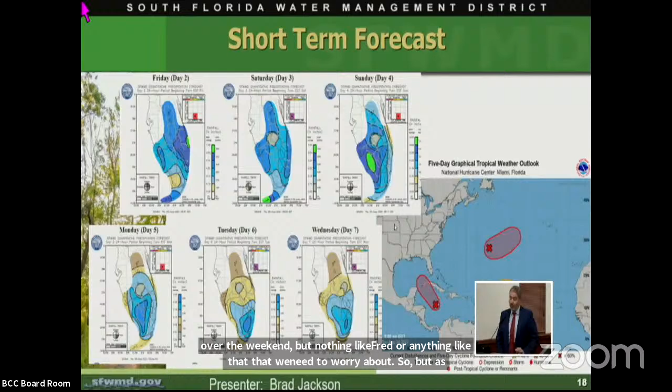And with that, I'll be happy to answer any questions.